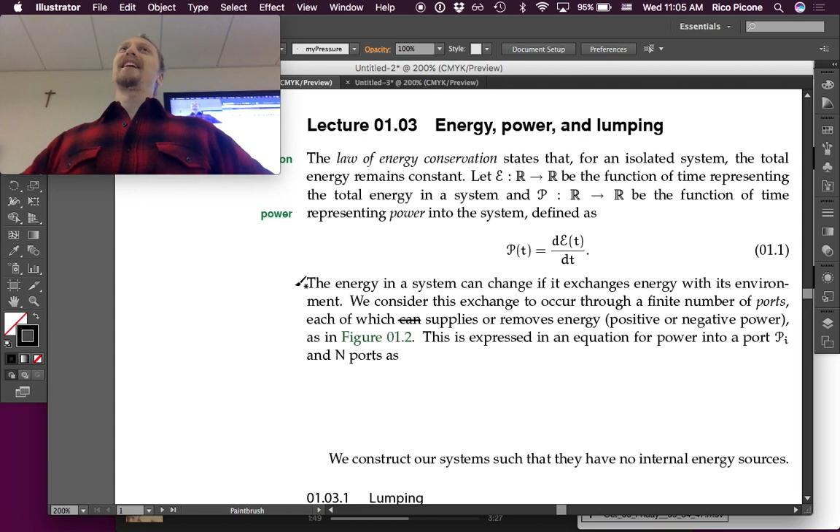All right. Energy, power, and you guessed it, lumping. Yeah, I know that seemed like the next logical thing after energy and power.

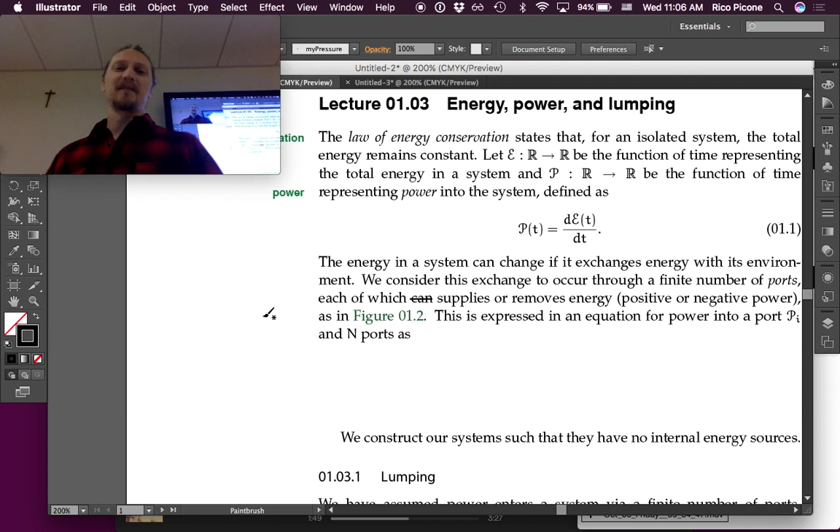By the way, I just finished this really great book that is mostly about power, by Michel Foucault. It's called The History of Sexuality, Volume 1. Really good. You might think it's about sex, but it's actually about power. Interesting book.

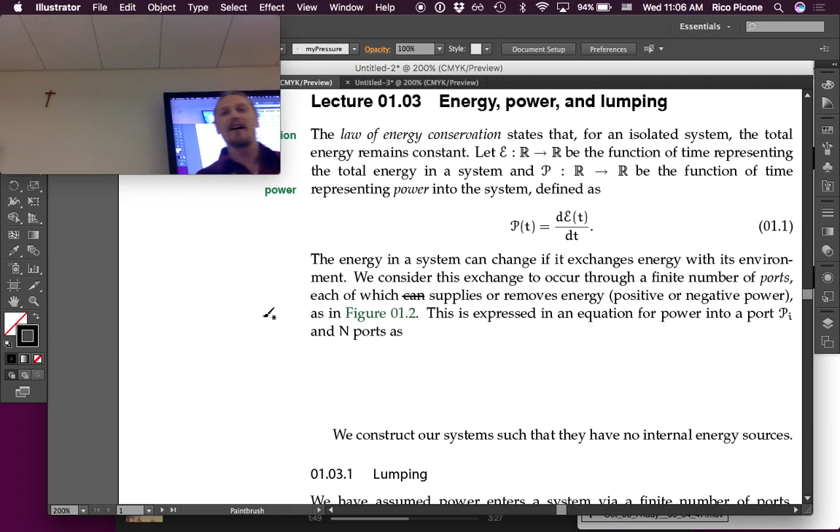Topical too, right? So the law of conservation of energy states that for an isolated system, the total energy remains constant. Okay. Let E be a function of time representing the total energy in a system, and power be a function of time representing power into a system, defined as the time rate of change of the energy in the system. Okay. The energy in a system can change if it exchanges energy with its environment.

We consider this exchange to occur through a finite number of ports, each of which supplies or removes energy, positive or negative power, as in figure 1.2, which is right here. So, system, as usual, it's a peanut shape. And we have a finite number of ports. I had to choose a number, 3, but there could be more, or there could be fewer. So through a port, we can have power come into a system. Notice I'm always drawing the arrow in because power into a system is considered to be positive. Power out is negative. So if we draw the arrows in, then if it comes out negative, we know it's leaving the system.

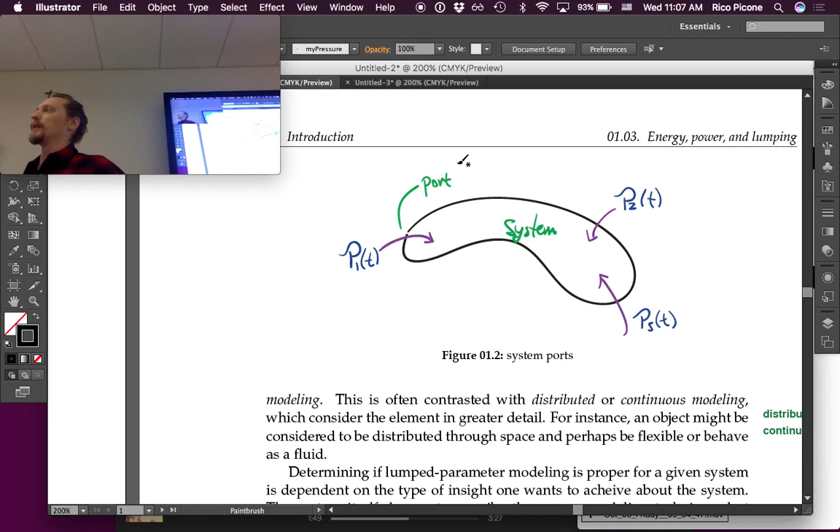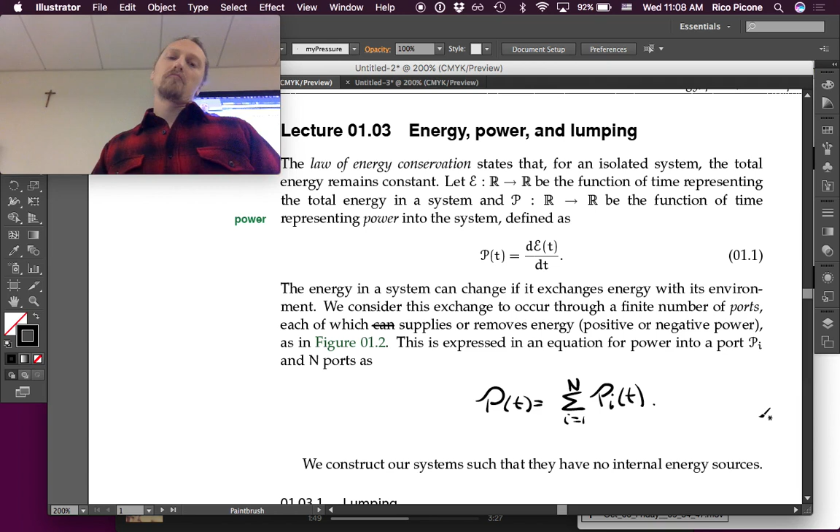Okay. This is expressed in an equation for power into a port P_i and N ports as the power being equal to the sum from i equals 1 to N of the port powers. So you sum up the powers into each port and you get the total power, which makes sense, right? Is there a reason you use script P? Yeah, it's just common to use script P for power. I try to stay close to the notation in the Rowell and Wormley textbook for this.

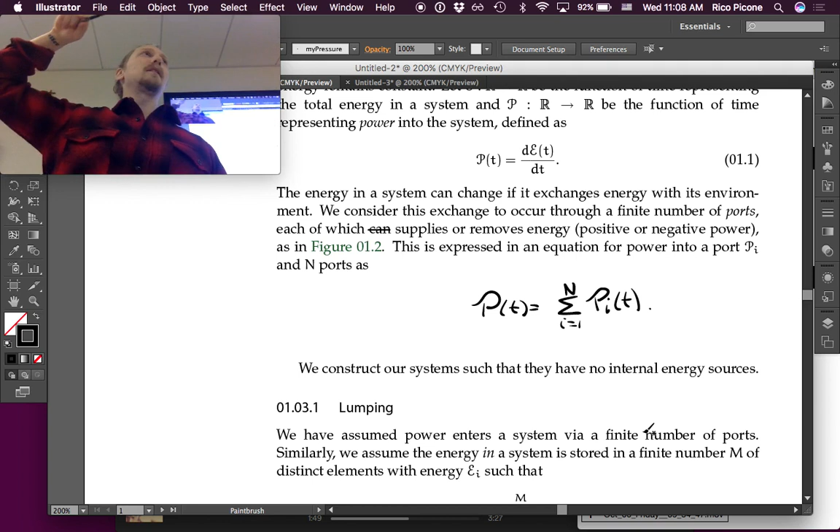We construct our systems such that they have no internal energy sources. By saying that, I don't mean we just won't build systems that have internal energy sources. What I mean is we're never going to include the power sources inside the system. The sources are coming from outside. So if you have a battery in a car, the battery is on the outside of the car, powering into it. Yeah, so we consider the system to be that which does not contain the battery.

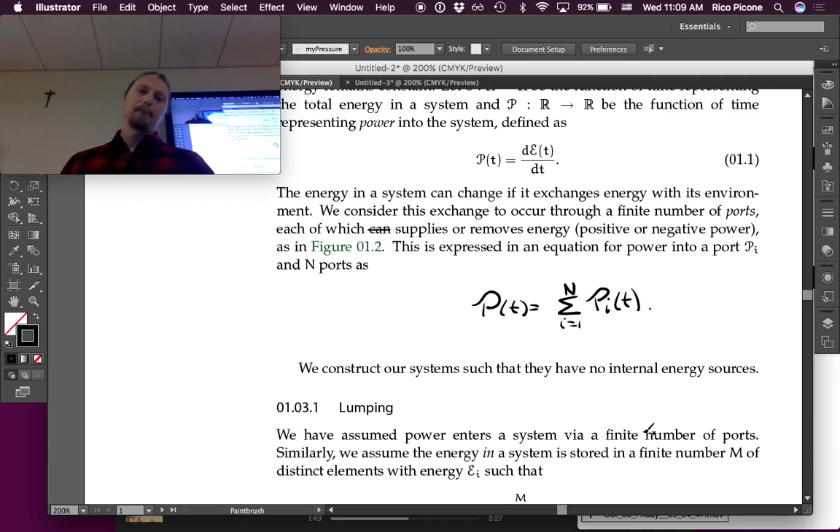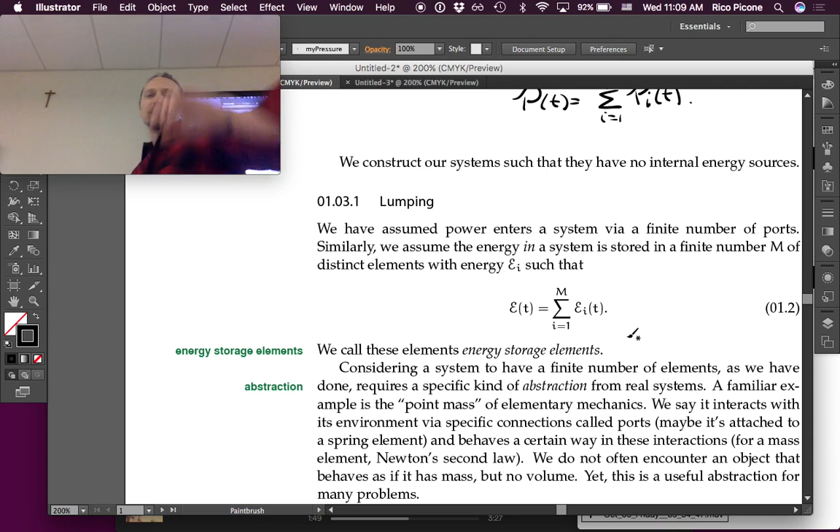Yeah. All right, so lumping. We already did energy. We already did power. We're already lumping. The Presidents of the United States of America wrote a fun song about this.

So, we have assumed power enters a system via a finite number of ports. Similarly, we assume energy in a system is stored in a finite number, m, of distinct elements, each of them having energy E_i, such that if you sum up all of the energies in each element, you get the total energy in the system. We call these elements energy storage elements. So we'll talk more about energy storage elements.

But we're familiar with the capacitor, for instance. A capacitor stores energy in an electronic system. So that would be a lumped parameter element in an electronic system that stores energy. In a mechanical system, you might use a spring, for instance, to store energy. So we'll talk more about that later today. In fact, this very day, we'll talk about it.

Considering a system to have a finite number of elements, as we have done, requires a specific kind of abstraction from real systems. A familiar example is the point mass of elementary mechanics. And when I said point mass earlier, everybody looked at me with blank stares, and I was like, is this not a thing that you guys have heard before? So you guys have definitely used point masses before. You just might not have heard them called point masses.

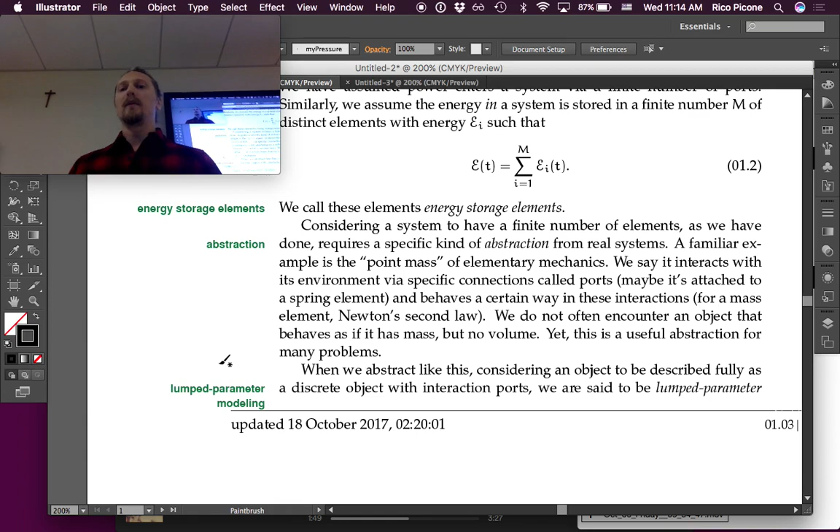When we abstract like this, considering an object to be described fully as a discrete object with interaction ports, we are said to be lumped parameter modeling. This is often contrasted with distributed or continuous modeling, which consider the elements in greater detail. For instance, an object might be considered to be distributed through space and perhaps be flexible or behave as a fluid. Whereas the perspective we're going to take in this class is a lumped parameter modeling approach.

Determining if lumped parameter modeling is proper for a given system depends on the type of insight one wants to achieve. The system itself does not prescribe the proper modeling technique, but the desired understanding does. Every system is incredibly complex if one considers it at a fine granularity. Even a circuit, a really well-controlled system, has components with some variation. There are electrons wanging around, things heat up. Even a high quality circuit is always some abstraction we use for the model.

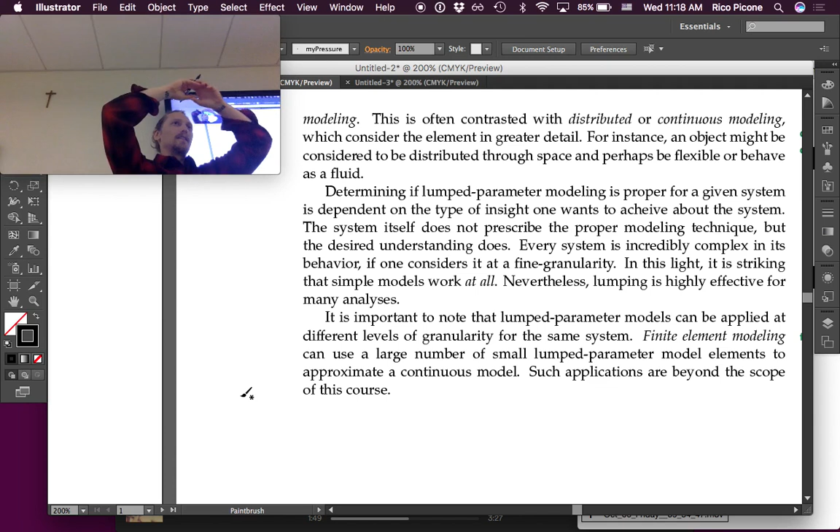system. Finite element modeling, also called FEA analysis, which commercial software like ANSYS uses, can use a large number of small lumped parameter model elements to approximate a continuous model. So it can chop a continuous model up into a bunch of little discrete chunks, and then treat it as a sort of lumped parameter model.

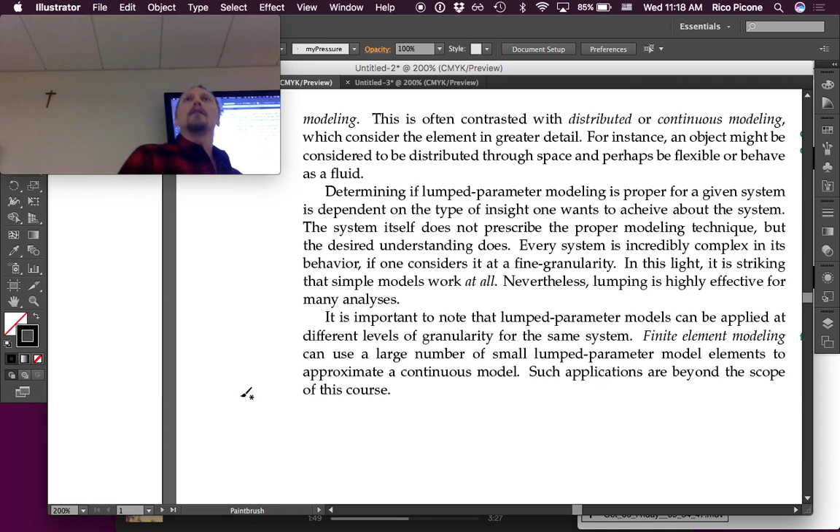Such applications are beyond the scope of this course. In the system dynamics course, we'll just barely touch on that. For instance, a course you'll take in your senior year is heat transfer, right? In heat transfer, you're interested in how thermal energy moves around through materials, via conduction, convection, radiation, etc.

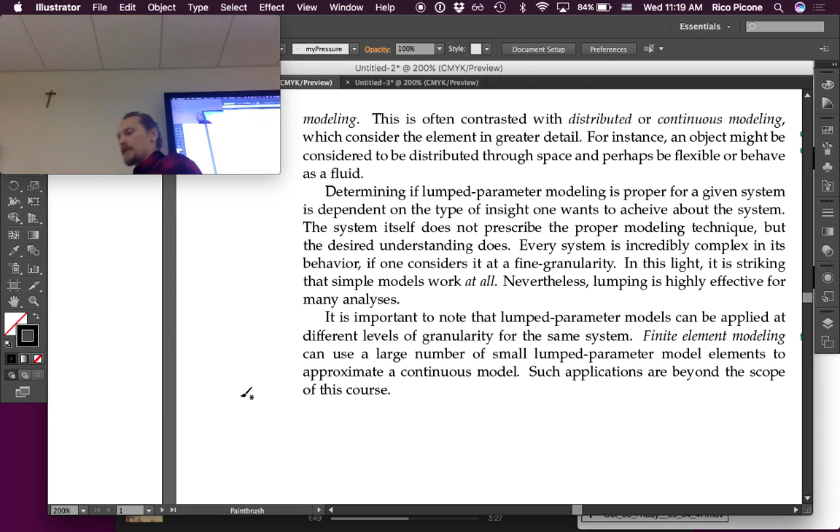And it turns out that one really useful thing to do with thermal models is to chop them up into small pieces and do numerical simulations on what would happen, especially when you get into very complex geometries, because your analytic solutions to the equations are going to be less and less helpful. So we'll do a little bit of that in system dynamics as well.

And you're trying to decide between these, and one example would be, say you have a pipe. I'm going to make it a little bigger. So you have a pipe. You have fluid flowing through this pipe. Now, you might care about what the actual velocity profile looks like in this.

So if you took a section of it and looked at the velocity profile, you'll find next semester in your fluids class that the velocity at the outer radius is pretty small. And we actually often approximate it to be 0. But then as you go towards the center of the pipe, the velocity increases more and more.

So there's this velocity profile. It's not like all the water is moving through the pipe uniformly. Stuff at the edges is moving slower than the stuff in the middle. And sorry? Like in a wire? Yeah, different phenomena, but you can think of this as in here moving fast, up here moving slow. Now, you might care about that.

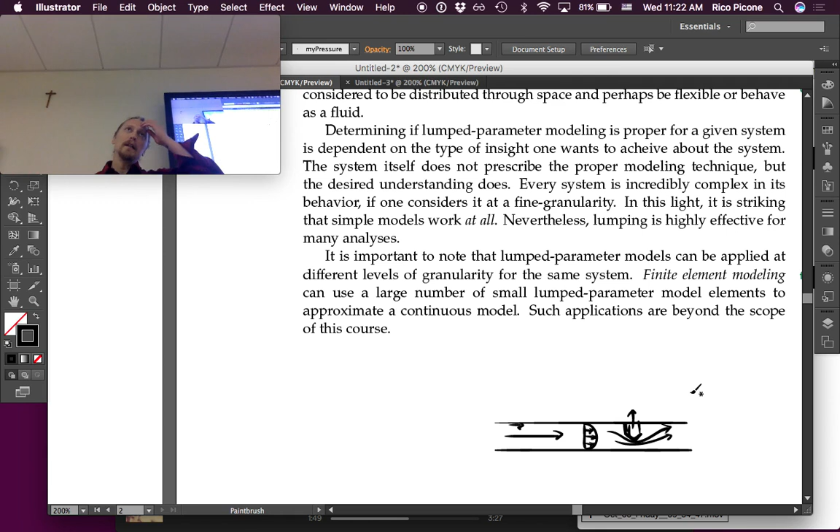So you could think of the streamlines as going around it, and how the geometry is going to affect how the fluid moves around it. In that case, you need a distributed model. You probably are going to need computational fluid dynamics software. ANSYS also includes that. And you're going to want to look at a simulation of this stuff.

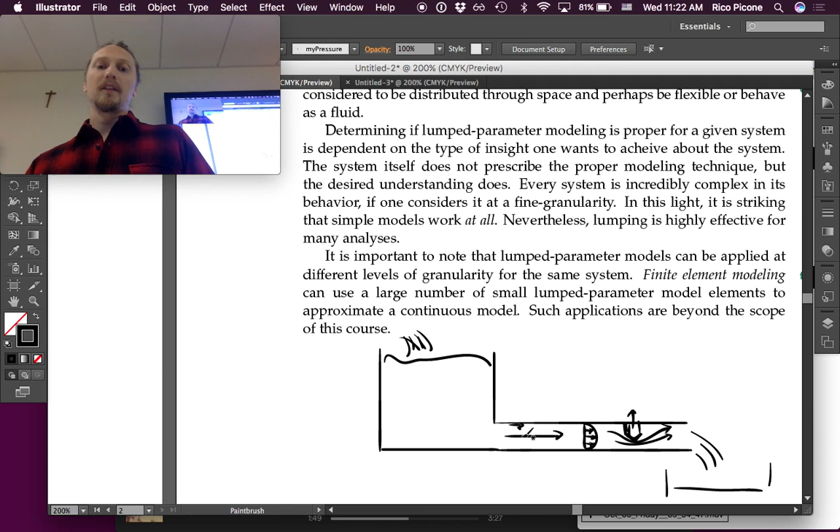Okay? But maybe this pipe is being used like this. You've got a tank here, and maybe there's some water coming into the tank, and then it goes through this and comes out here. Maybe you've got another tank down here, etc. A system with a bunch of tanks and pipes. Maybe there's a pump on here that's increasing the pressure between these 2 points.

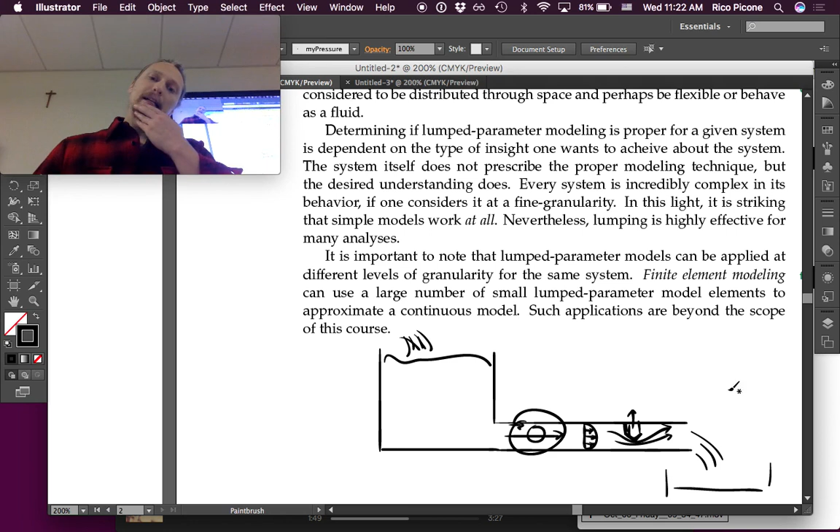And maybe what you care about is controlling the level of water in here, given a variable input flow. Maybe it's runoff water, so you can't control how much comes in, but you can change the pump flow rate or pressure. So maybe you want a constant volume in this other tank. That sort of problem is really good to solve with a lumped parameter model, okay?

Where you say, okay, this tank, if you think of it as a distributed system, every point in the tank has a pressure. So pressure is a function of x, a function of y, and a function of time. It's complicated as hell, right? Every element you've got to keep track of, and there's a lot going on there.

Yeah, and the flow through this orifice and through the pump is going to be really complex. There's all kinds of stuff going on there. And sometimes you care about that level of analysis, but other times you're just like, I want to control this, or I want to simulate how well I can control this.

And so you're going to take the position that, okay, this tank behaves like, and we'll talk more about this next semester in system dynamics, but this tank behaves like a fluid capacitor. It contains a certain amount of fluid, and its pressure at this point kind of describes it in a lot of ways, like the height of the fluid in it determines what the pressure is there, and maybe the velocity of the fluid leaving the tank through the pipe. That's another variable that is important.

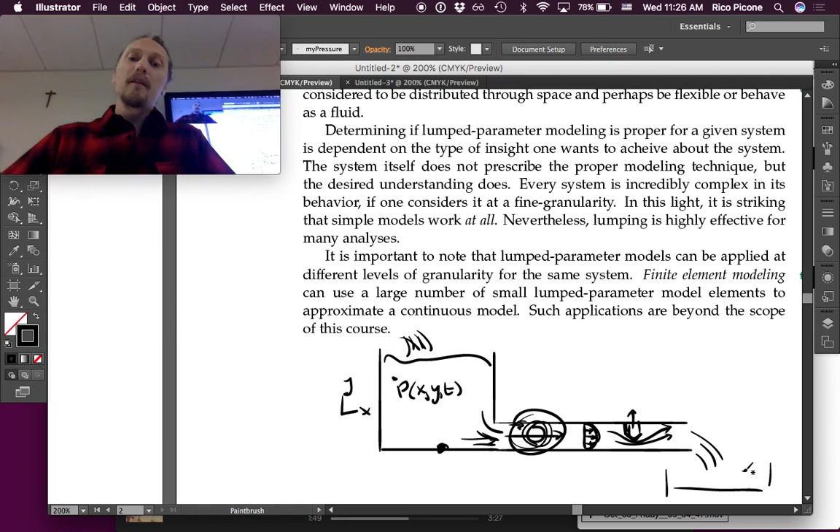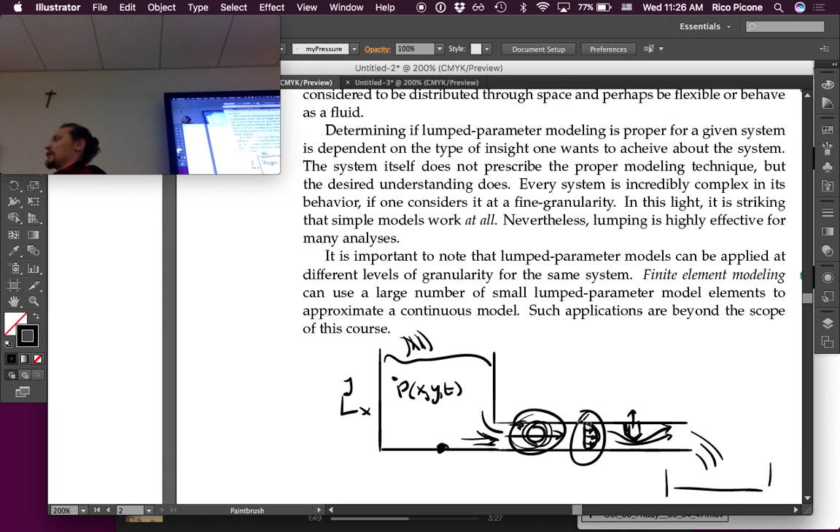And I actually am a little biased, but I feel like it's more useful as a tool to calculate stuff than a lot of the distributed models are. So you're going to learn in your fluids class some distributed modeling techniques for fluids, and in your heat transfer class for thermal systems. Those are really great, and they give you a lot of intuition about this kind of stuff. But when it comes down to calculating something, oftentimes lumped parameter stuff is going to get you what you want to know faster, or maybe at all.

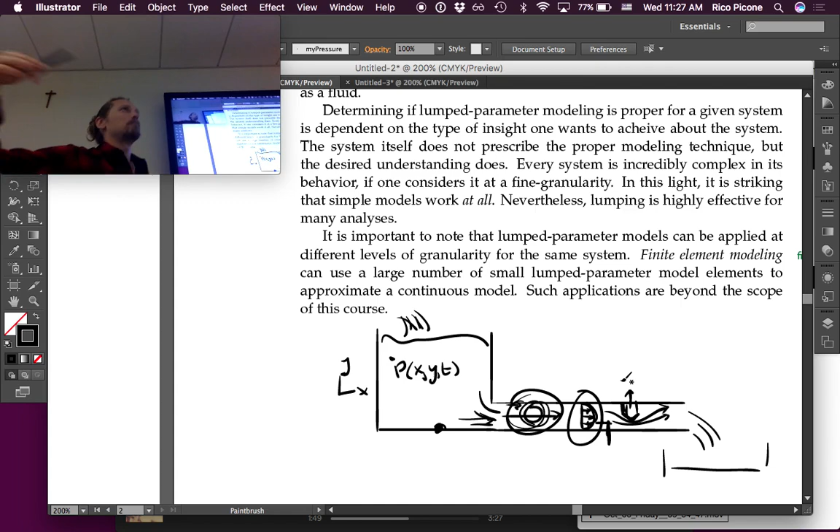So an example of when you would be really informed by a distributed model, and yet the distributed model would not be useful necessarily for calculation, but the insight that you gained from it is important: you might want to measure the flow rate through this, so you might stick a probe up here. But if you don't know that the velocity profile changes in the pipe, you're going to get a reading and just think, oh, well, that's the velocity. If you know that there's a profile that develops, then you won't be taken in by that naive assumption. Okay, that was all I've got for that lecture. Any questions on that before we move on?

Yeah. Is it like the fluids? There's laminar motion or ideal motion, or do we just not care about that? Did you say laminar motion, like with fluids? So in lumped parameter modeling, do we consider that? Is that what you're asking? So we typically don't. In this example, the velocity profile is assuming that you're going to have laminar flow, not turbulent flow. But you might have turbulent flow, especially when it goes through a pump, and that's very complex, right? There's a whole lot going on in there.

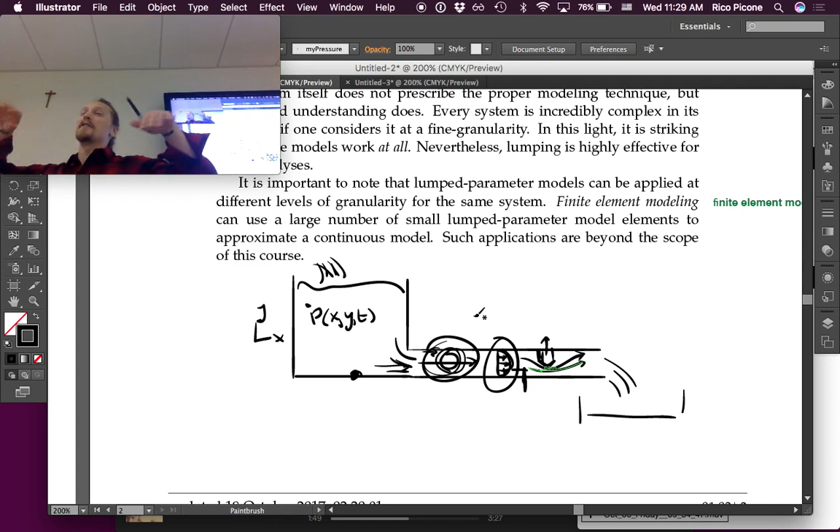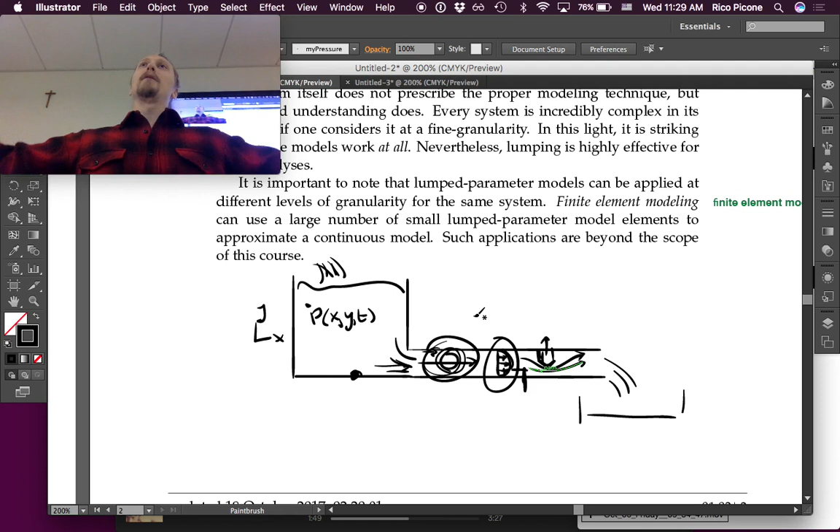But from a system dynamics lumped parameter modeling perspective, we can just ignore all of that and say a pump behaves like a pressure increase, or maybe a flow rate increase. And we can tuck all the details in. Yes, there's turbulent flow going on in there. If you wanted to design the pump, you would need to explore that. But if you are just using the pump and designing the whole system, lumped parameter modeling is a nice way to go, and you can avoid questions of laminar versus turbulent flow and effects of the detailed geometry of the pump. You could look at just what the pump curve looks like, extrapolate from that, and build a model.

These are always approximations, right? But they're typically really useful approximations. Not always. Sometimes you might do a lumped parameter analysis and learn that you really need the distributed analysis. So, yeah. Okay. Cool. Any other questions?